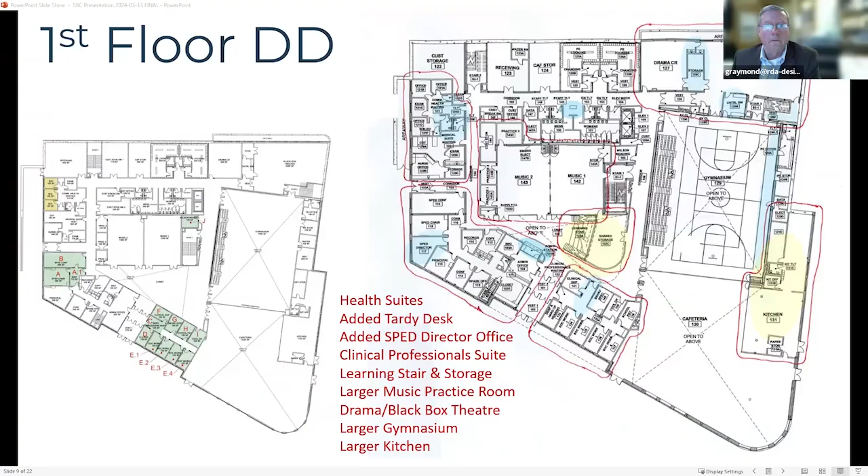There we go. Thank you, Craig. Well, so I'm gonna back up one slide. Oh, no, I'm not. That's what Lynn just went through.

So we've been in the design development phase, as you heard. And this is one of three submissions we make to MSBA before everything's done. And the purpose of design development, we had shown you this before. There's really kind of five bullet points.

We've taken the diagrams that were in schematic design that the cost estimate was based on. And we spent, I have to compliment the school department, we spent a lot of time with their staff, and they were very generous with their time and getting the right people in the room. And we went through pretty much every room in the building, where it was, what size it was, how it would be outfitted. This is the purpose of design development, is to actually start to finalize, move things around and finalize all the layouts. So I'll show you some of the things that we did in some future slides.

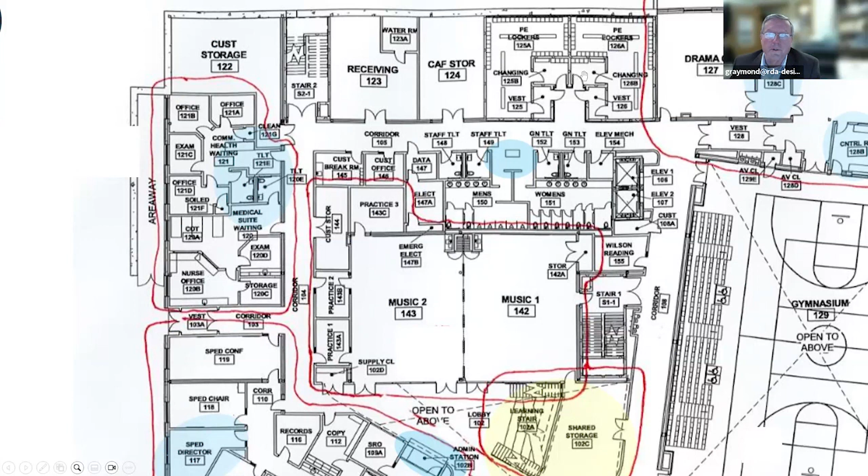So believe it or not, one of the issues was we used to have them so that you just came in from the locker room itself. And I think the staff said it'd be nice if there was a door here, so if there was something going on in the black box, this could be used as a changing area without having to go into the locker room.

Nice, a lot of these changes have been really making the building more flexible. And we love it because it just makes it bigger.

Oh, the biggest thing: we had this really big lobby. The lobby at Thurgood Marshall is pretty good size, and this one was even bigger. So we said there were a couple things going on. We were kind of shy on storage space because we have this portable platform that's going to be out in the gymnasium.

So the gym is going to be the gym, but it also will be used for performances. There's a portable platform that would be the stage, and the audience would be on the left. But where does that stage get stored when 90% of the time the gym's not being used for performance? So we could use some more storage area.

And then we had this really large lobby, so we said, why don't we take a look at activating the lobby? We did what many schools do, and we saw one of these in Scituate when we toured it, and we created a learning stair, which for lack of a better word is kind of like a set of bleachers. So if you're up on the second floor, it's just tiered.

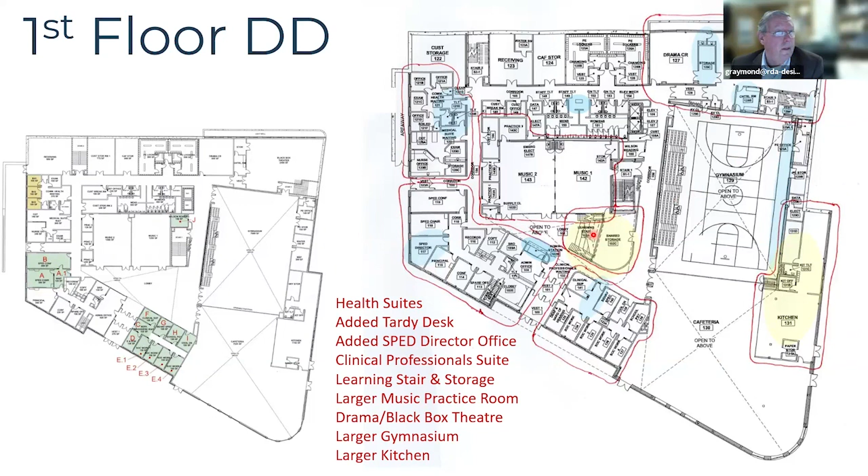Does anyone have any other questions about that, or I guess the first floor? I don't mean to drag the meeting out, but I'll just go through some of the highlights of what the staff came back with and we incorporated.

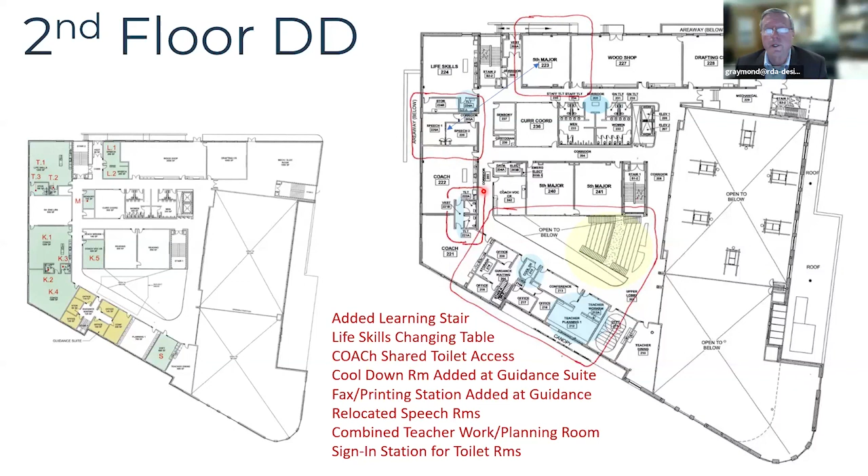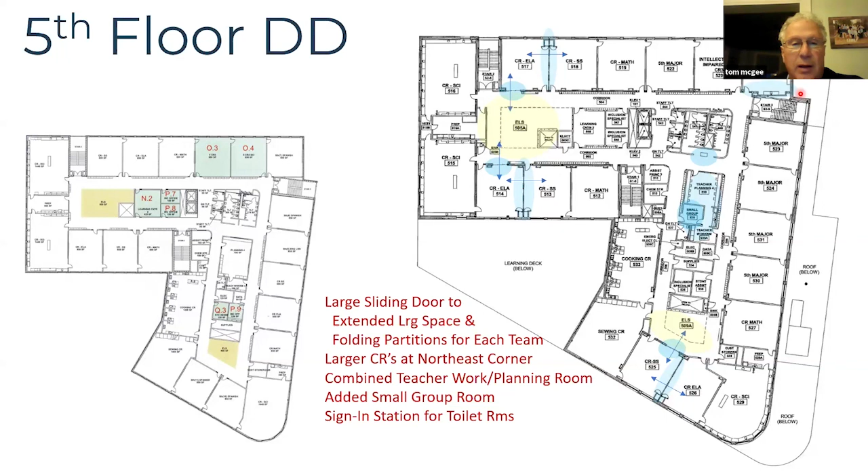Thanks, Gene. Nice presentation. Exciting to see the reality coming closer to happening. I had a quick thought, you want to go to the third floor? Sure, yeah.

So in terms of the pricing for the outdoor plantings, whether it be food or other plantings, has there been any discussion about a partnership, maybe with the food project or other things going on in the city, both at Tech and up at Ingalls? I wondered if that would be an opportunity to get dollars from another place or partner to create the plantings there, like we've done on other school property. I just throw that out there as an opportunity to maybe still see it happen without it being part of our budget. I don't know if the mayor or others want to explore that further, but just a thought.

Yeah, it's a great point. Those are two examples, and they've actually added or are in the process of adding others as well. So we can certainly bring that up with them.

Yeah, Gene, I think at a minimum you can put the MEP around, the water, and structurally make it ready. If funding is the issue now, at least get it ready for future usage. Every idea is a good idea, honestly. Because if you don't run your water now, or design it structurally with this intent, then the future is definitely going to be difficult.

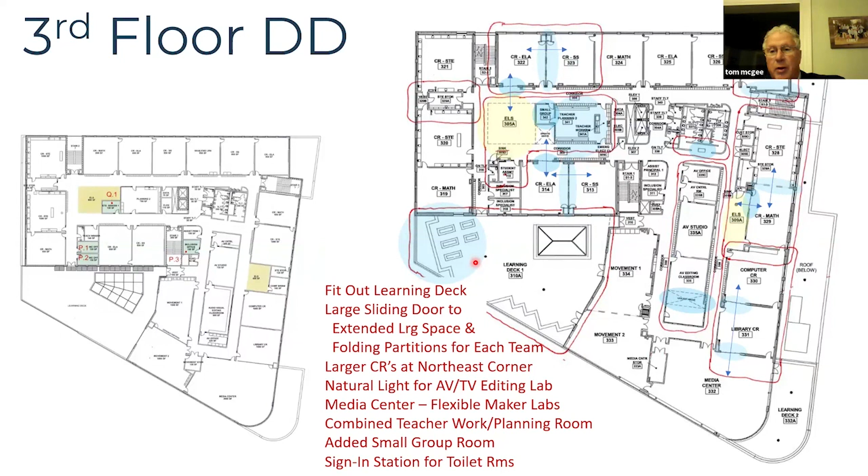I don't know if, Flory, you were also talking about maybe plumbing or access to watering, putting the pieces in place so that if it does come to pass, or others come to the table, there is an ability to water and take advantage of that for whatever plantings might happen up there. I don't know if that might have been what you were talking about as well. Yep, yep, yep, yep.

I think one thing you have to consider too is the new plumbing code for gender neutral restrooms. Yes, we do have gender neutral restrooms on every floor, I kind of forget where it is on this. I think all the gang restrooms and all that have to be gender neutral now. Gotcha. And then Mike Donovan was good enough to point out, hey, make sure the plumbing code changed a few months back, make sure that's not going to be a problem. So we've kind of vetted that, and we're actually showing more fixtures than the new code requires. So it's one of the rare instances where, with gender neutral, the urinals are eliminated and they're all compartmentalized toilets.

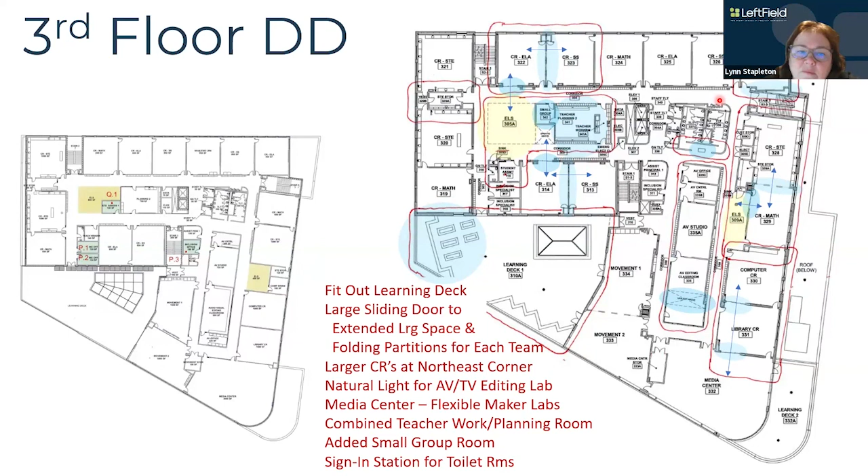Lynn, is FF&E part of this process here now? Is there a package available or not? We have not started the FF&E yet, other than Jean has looked at how classrooms are laid out. But as we start to develop the FF&E program, it's probably further into construction, maybe a year out from when we need it, that we'll start to develop the packages and get them ready to go out to bid. It's good, thank you.

I'll skip to my last slide, but we can come back to anything you've seen. I mentioned it earlier, but we have fully designed the site, and the contractor is in the process of bidding it. If the permitting goes smoothly, the prices will be in. Hopefully a contract will be able to be executed, and this site work could start in May.

The other thing that's going on is with these drawings, they're not only going through the state permitting, but we've submitted these to the Lynn Conservation Commission. So kind of beyond the building itself, we're trying to get all the site permitting in line, and so far so good.

And Lynn, that's what we have so far. I have a quick question on starting in May. Can you be more specific where you're going to be starting? Because we do have the schools in session.

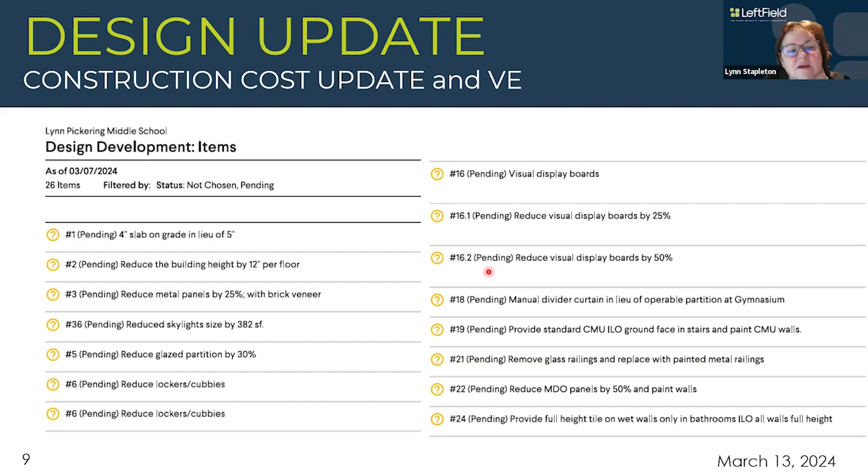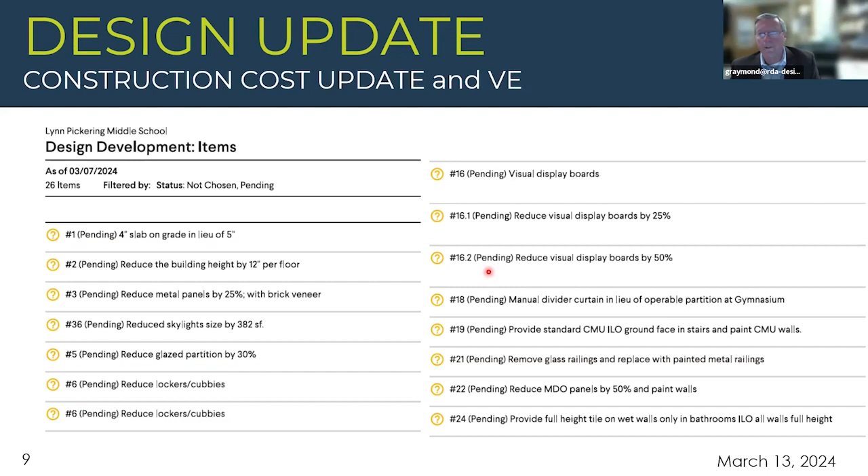Jean's got to look at them and review them and make sure there's no changes to the academic or educational programs in order to accommodate these VE items. So we're all putting our heads together. Sometimes it's stuff coming from RDA, sometimes from LeftField, and this list happened to come from Consigli. A whole bunch of different things. We'll put numbers on them all and decide what the best value is.

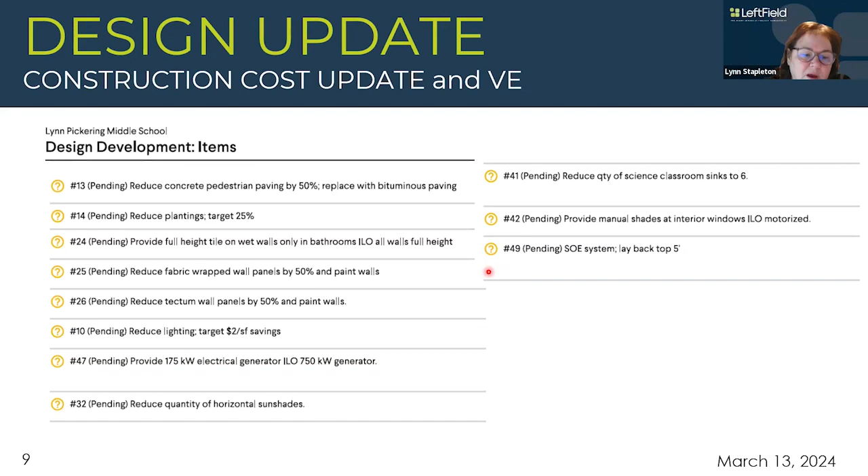I interrupted you, Lynn, I'm sorry. No, I just wanted people to understand we're working to try to get there. We might not take all of these, as you see, they're all pending, but between the ones that Consigli has come up with and the ones that RDA comes up with, we're hoping to get to our target budget without messing up the educational program.

Yes, so Brandon, I believe you're on. Can you just run everyone through the summer construction schedule, what you're anticipating and when you're anticipating getting started and what that looks like? Yeah, so the schedule you see on the screen here is a little more eager than where we're thinking the permitting phase might land.

So we are kind of tied to where that lands for us. But the goal of this summer's work would be to complete our mobilization to site fence, separate the job site from the public and the school, and then work very heavily on the retaining wall and ramp at the backside of the existing school. So Lorraine, to your question earlier, we would be close on one part, but the key there is to complete all that work.

So when we take over their current playground space, we are turning over the new space so they can use it in the same capacity they are now. So that would be our main goal for the summer, as we get in there and get done before kids are back for next fall.

Do you want me to go back to the site plan, Brandon? Is that helpful? Sure, or Lorraine?

I can't resist. Give me a sec.

So Lorraine, what Brandon was saying was on the back, this is the Sisson wing, right? And on the lower side here, it's overlooking Magnolia Park. So this is up high. The new Sisson playground is going to be down at Magnolia Park level. So there's a retaining wall that's going to hold up the earth, and then this is going to be lower.

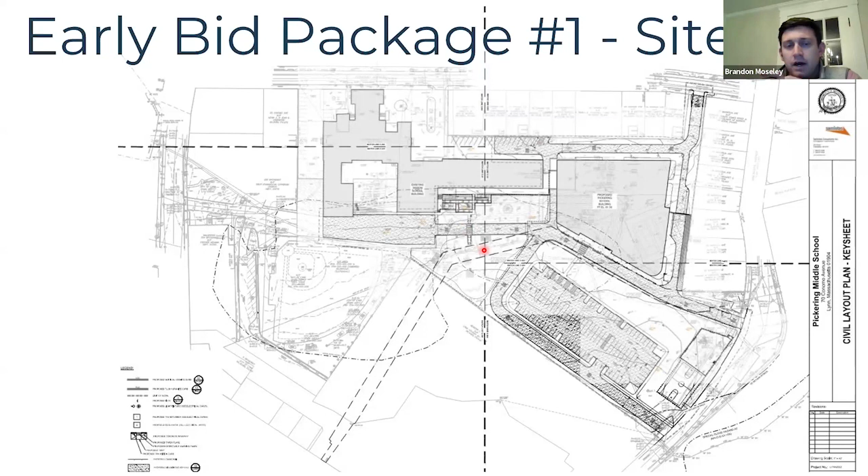And you do have the new sewer line, right? That's going to be starting down near where the community playground area is. Yes, we do need to coordinate and make sure that we keep the existing utilities on to the school that are there now, so there will be some work associated with the sewer this summer.

And when do you anticipate those packages are going to be going out for bid? So those are going out now, with the goal of about a month from now coming to this group with a recommendation for who we'd like to bring on board as our site contractor.

I was actually in that plan, like where the elderly housing is, that's the fence I was talking about, because you sort of said, oh, we're gonna give you a new fence. Yes, they like that, okay. Yep, it sounds good, that would be perfect, thank you.

So Brandon, I don't know if there's anything else you wanted to highlight on this, but you're in this late April, May start, right? Yes, it'll always be a slow start. That first week you'll see stuff kind of come together, separating us from the rest of the school land there. Everything we have to do to get set up for the project, and then sometime mid-late May is where we really start seeing work happen.

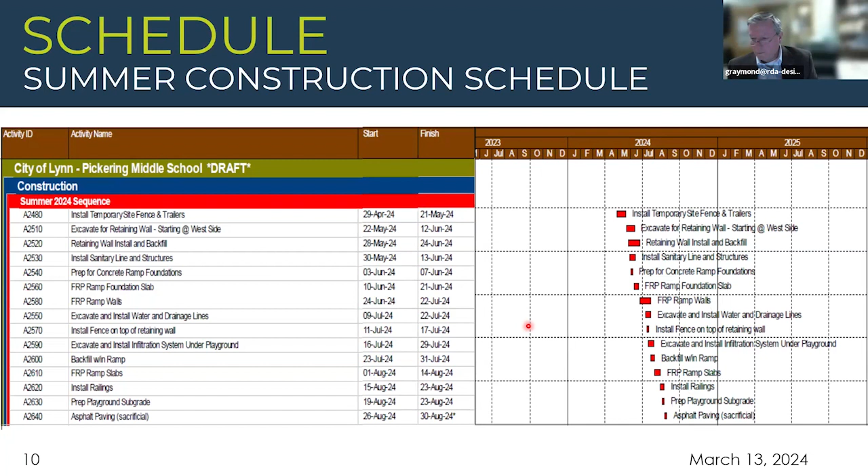Let's see what the next slide is. Does anyone have any questions on what is anticipated this summer? If not, I can just go to Lynn's next slide.

So just a quick update, we're proposing to schedule another SBC meeting on the 27th that you see here. And we'll be sending out the draft of the design development hopefully before March 25th, but at least by March 25th. We have today planned to ask MEPA to schedule their site walk on March 27th.

And there's a public consult meeting that has to occur, and we're looking to potentially have that on the same day, prior to the SBC meeting. In this case, both would be hybrid, the SBC meeting and the MEPA outreach meeting, if we can get that scheduled with MEPA. We'll need translators for the outreach meeting as well as the MEPA site walk. But we're in the midst of trying to figure all of that out and get MEPA tied down.

We have to complete this by April 1st, or we have to extend our outreach time frame by 30 days. So we're trying hard to get that in prior to April 1st.

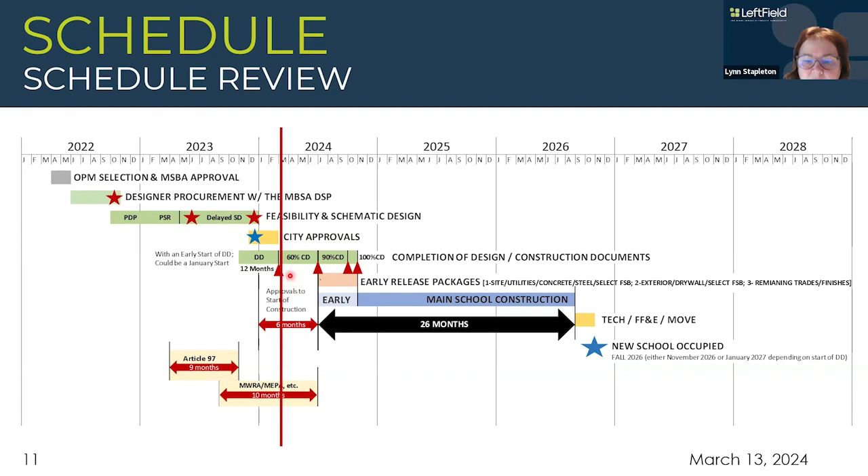As for Article 97, it's not complete yet, but I believe it passed the House and is into the Senate, and after that it'll go to the governor for signature. That's all I have for tonight — does anybody have any questions on the schedule, cost, or any of the other items presented tonight?

Tom? Lynn, I just wanted to take time to express how great the school is looking and the geothermal coming on board. I know Rich Miles spent a lot of time working on that. It's going to be a great thing for the city of Lynn, this building's going to be great. The city deserves it, and I want to thank everybody, especially Rich, for working hard at this.

Great point, thank you Tom, thank you Rich. I also want to jump in here — after the last building, finally it's going to be starting. I hope everyone on this committee realizes we are going to be starting the Pickering Middle School building. How exciting that is, we so deserve it in this city. Thank you all for your hard work.

Thank you, yeah that's a great point. And I imagine we will talk about doing some kind of groundbreaking this summer, and we'll of course let this building committee know.